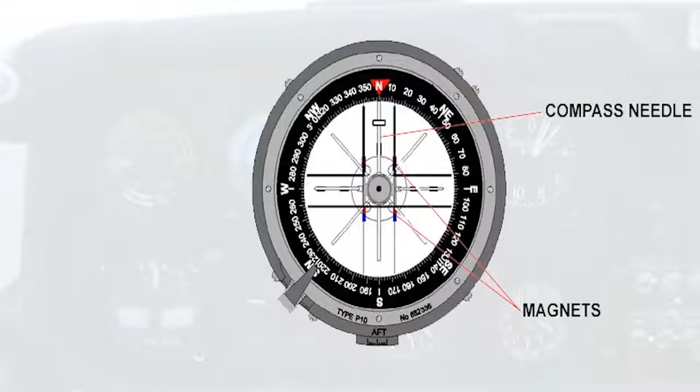A compass is an instrument designed to indicate direction on the surface of the Earth, relative to some known datum. The magnetic compass uses the horizontal component of the Earth's field as its directional datum.

Unfortunately, the Earth's field is normally not aligned with a true meridian, the most desirable datum from which to measure direction. The angular difference between true and magnetic meridians is called the magnetic variation.

The purpose of a magnetic steering compass in an aircraft is to indicate heading, the direction in which the aircraft is pointing.

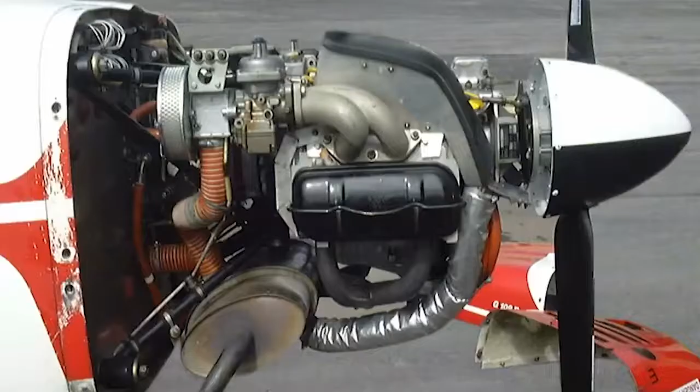Magnetic influences, such as iron or steel components and electric currents, distort the Earth's field so that the compass magnetic assembly deviates from the magnetic meridian. This is called compass deviation.

The rules for applying variation and deviation to the compass heading indication, in order to determine true heading, are discussed later in this lesson.

This part of the lesson deals with the direct indicating, or direct reading, magnetic compass, where the pilot directly reads his heading in relation to a pivoted magnet assembly.

There are two basic types of direct reading magnetic compasses used in aircraft: the vertical card and, less commonly, the grid ring compass.

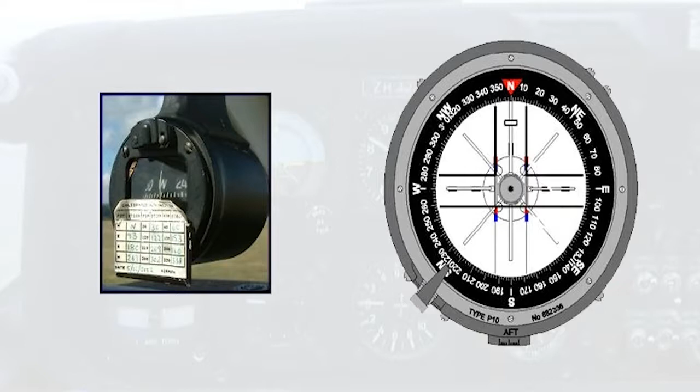The vertical card compass, also known as the B-type or E-type, is a direct reading compass in general use. It's usually the main magnetic heading reference in light aircraft, and the standby compass in larger aircraft.

It consists of a circular compass card attached directly to the magnet assembly. This combined unit is suspended in liquid within the compass bowl. A vertical lubber line on the glass window of the bowl enables the heading to be read off the compass card.

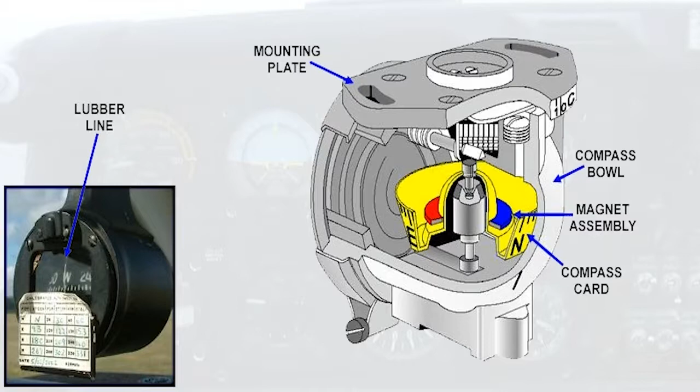The P-type compass, or grid ring compass, is found on older aircraft. It's more accurate than the vertical card compass and is more stable. It is, however, heavier, bulkier, and more expensive.

In addition, it can only be read in straight and level flight, as the grid ring has to be unclamped and aligned with the north reference before a reading can be taken against the lubber line.

The grid ring compass also differs from the vertical card compass in that it achieves greater aperiodicity by the addition of damping wires, which also rotate through the compass liquid.

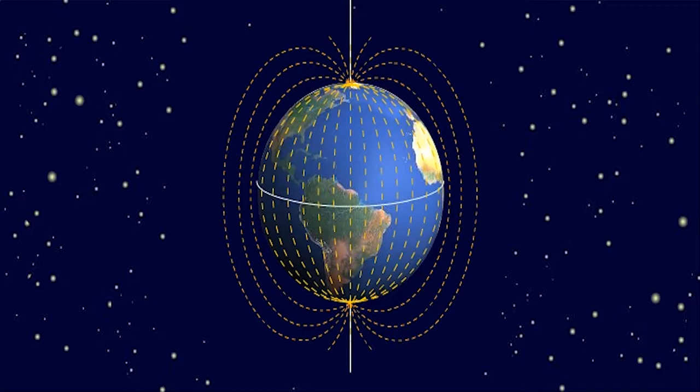The Earth behaves as though a huge permanent magnet was situated near its center, producing a magnetic field over its surface. The direction of that field at any given point can be indicated by a freely suspended magnet.

Such a magnet will align itself roughly in a north-south direction, with its red pole toward the north magnetic pole.

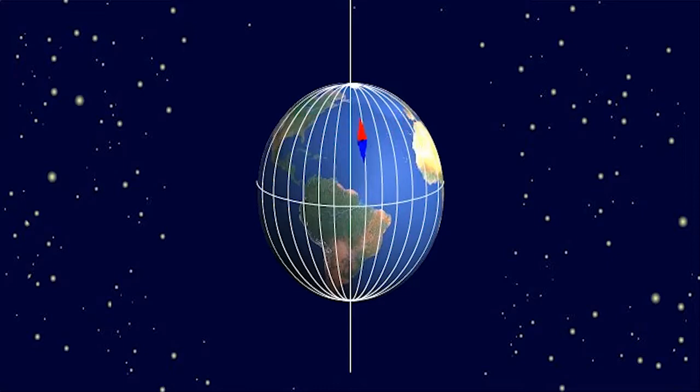However, the poles of the Earth's magnetic field do move, and are seldom coincident with the Earth's spin axis. The position of the north magnetic pole is moving at almost 10 nautical miles per year, and since it was

first located in 1831, it's moved approximately 625 miles, and is presently close to Ellesmere Island in the Canadian Arctic Islands, which are 650 miles west of the geographic North Pole.

That would make the magnetic lines of force lie like this, and the freely suspended magnet will align itself like this.

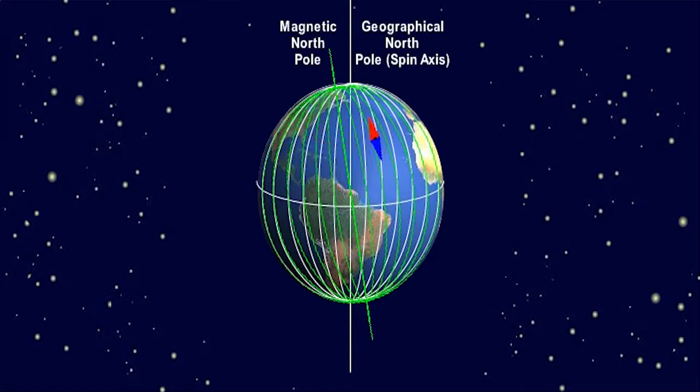The angle, measured in the horizontal plane between the magnetic meridian at a point and the true meridian at the same point, is known as the magnetic variation.

Variation is designated west or east, depending on whether the magnetic pole lies to the west or to the east of true north.

Variation can have any value from 0 to 180 degrees, the latter occurring on the true meridian linking the north geographical pole with the north magnetic pole.

A simple rhyme can be remembered which will help enormously in working out which way to apply variation to your heading: Variation west, magnetic best. Variation east, magnetic least.

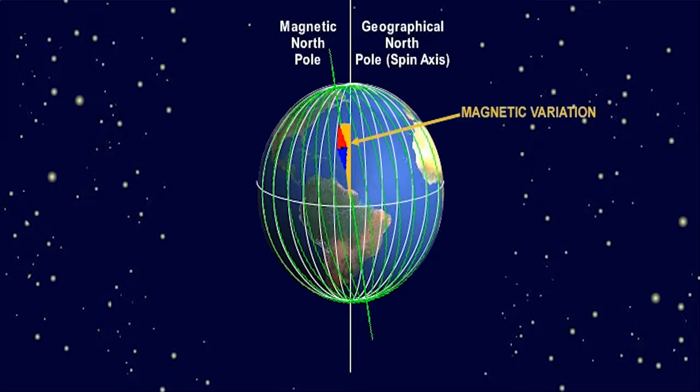Here, an aircraft is flying due east by reference to points on the ground. So, if the variation is west of true north, say 11 degrees west, then add it to your aircraft's true heading to get your correct magnetic heading of 101 degrees.

Conversely, if the variation is east of true north, say 11 degrees east, then subtract it from your aircraft's true heading to get your correct magnetic heading of 079 degrees. Remember: variation west, magnetic best; variation east, magnetic least.

Except near the magnetic equator, where the lines of force are parallel to the surface, one end of the freely suspended magnet will dip below the horizontal, pointing to the nearer pole.

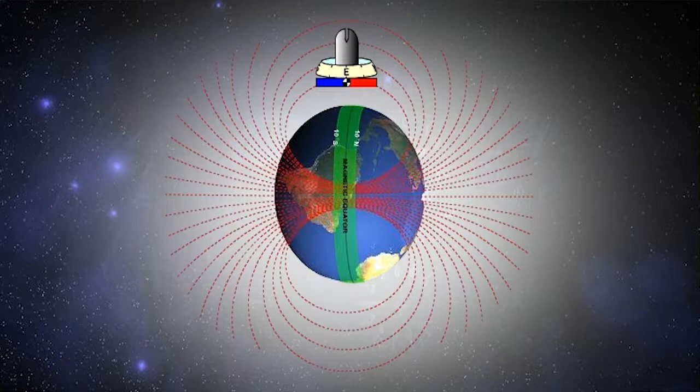To the south of the magnetic equator, the magnet's blue pole will be lower, whereas to the north, the red pole will be lower.

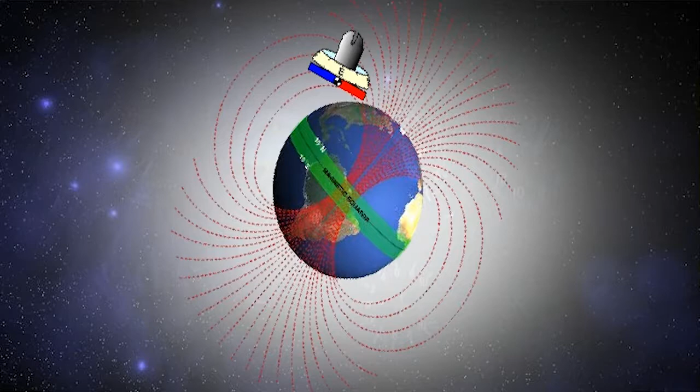The angle, measured in the vertical plane between the axis of the magnet and the horizontal, is called the angle of dip.

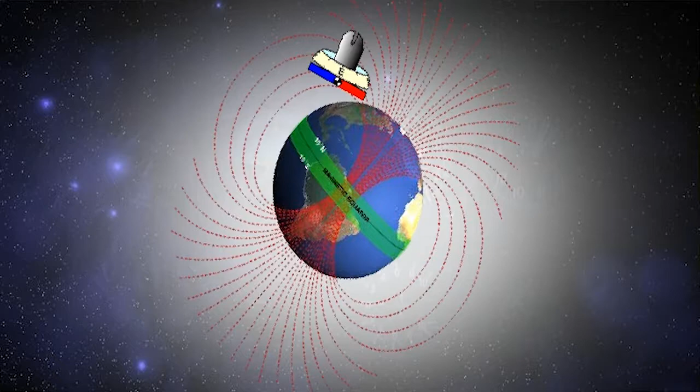If the freely suspended magnet is moved either north or south of the magnetic equator, the dip gradually increases, reaching about 66 degrees in the United Kingdom. Over the Earth's magnetic poles, the dip is 90 degrees, and the magnet is then vertical.

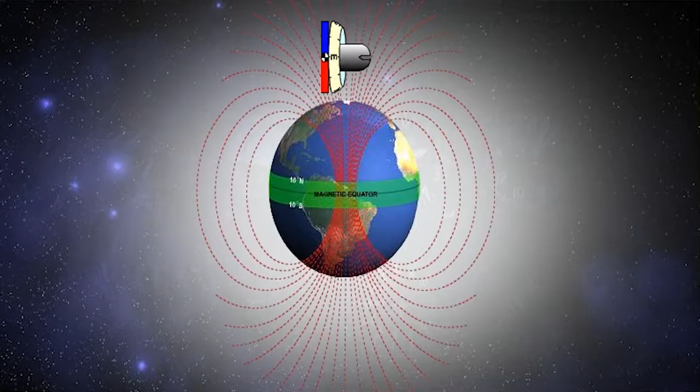During a turn, the liquid in contact with the inside of the compass bowl tends to be dragged around with the bowl. Therefore, the liquid tends to swirl and rotate the magnet assembly with it, in the same direction as the aircraft's turn.

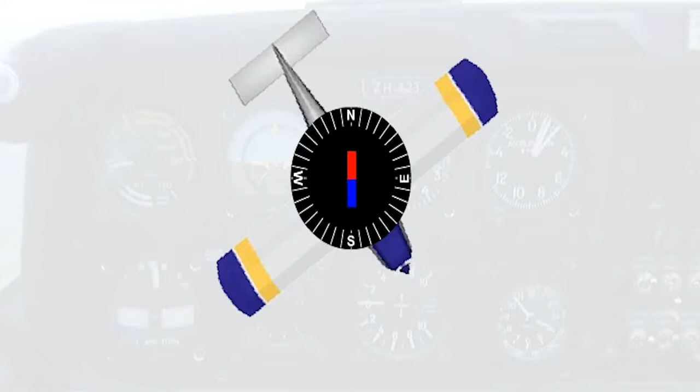Direct reading compasses are subject to large errors during linear acceleration or deceleration, or during a turn. Turning and acceleration errors only occur where there is significant magnetic dip, so that except for a small liquid swirl effect in turns, the errors are non-existent near the magnetic equator.

This diagram shows both the top view and the pilot's eye view of a pendulously suspended magnet, with residual dip, in the northern hemisphere. Note that while the aircraft is in cruising flight, the compass reading is correct. The magnet is attached to the aircraft at the pivot point.

However, while the pivot is being accelerated, the magnet will try to stay where it is because of its inertia, which acts at the magnet's center of gravity. The result will be that, even though the aircraft is flying in a straight line, the magnet will rotate, in this case anti-clockwise, and the incorrect heading will be shown.

Notice that once the aircraft is in cruising flight and the acceleration has finished, the magnet moves back to its original position and once more shows the correct reading.

Turning errors are maximum when turning through north and south, and ignoring liquid swirl, zero when turning through east and west. The error increases with increase in magnetic latitude. At the magnetic equator, the only turning error is due to liquid swirl.

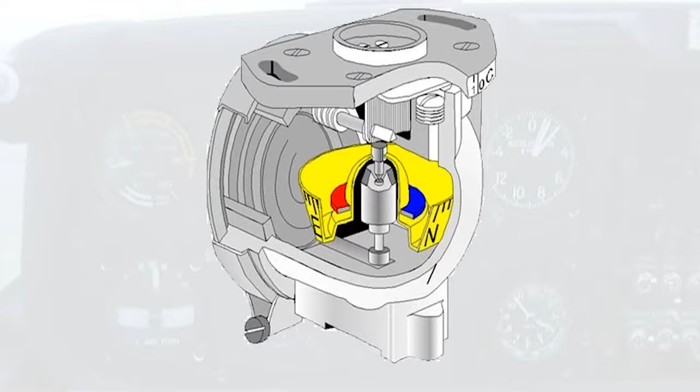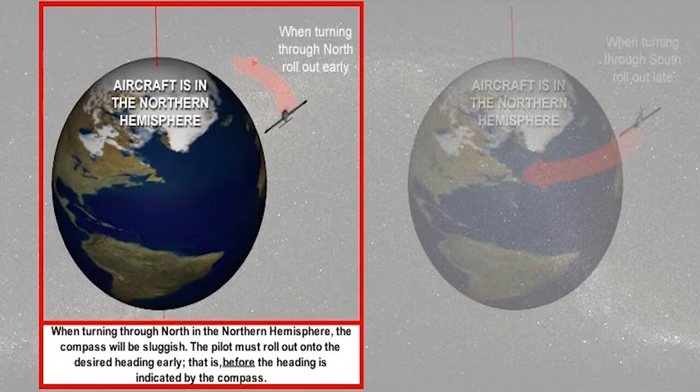Whenever the pilot turns through the nearer pole, that is the North Pole in the northern hemisphere or the South Pole in the southern hemisphere, the aircraft and compass rotate in the same direction, and the compass will be sluggish. The pilot should undershoot the turn, that is, he should roll out early.

Whenever the pilot turns through the further pole, that is the South Pole in the northern hemisphere or the North Pole in the southern hemisphere, the aircraft and the compass rotate in opposite directions, so the compass will be lively. The pilot should overshoot the turn, that is, he should roll out late.

Deviation is produced by the iron, steel, and electrical components of the aircraft. It's the angle between the local magnetic meridian and the direction in which the compass magnets are lying.

Deviation is named easterly or plus if the north-seeking red end of the magnet points to the east of magnetic north. If the north-seeking end points to the west of magnetic north, deviation is said to be westerly or minus.

Deviation varies with heading, so it has to be measured on a series of different headings. This is usually done by conducting a compass swing.

Once deviation has been reduced as far as possible, the residual deviation is recorded on a compass deviation card, which is located in the aircraft.

During the swing, normal flying conditions should be simulated as far as possible, with engines running, electrical and radio services switched on, and the aircraft in a level flight attitude.

It's obviously most important that no ferromagnetic objects such as tools or watches should be placed near the compass, as this would introduce unknown amounts of deviation.

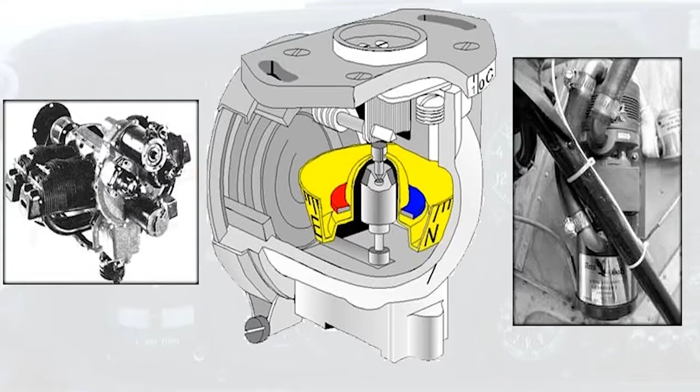Here we see that we are flying with a compass reading of 270 degrees. The compass reading is the magnetic heading plus or minus the deviation on that particular heading. The deviation card makes it easy for us to fly an accurate magnetic heading.

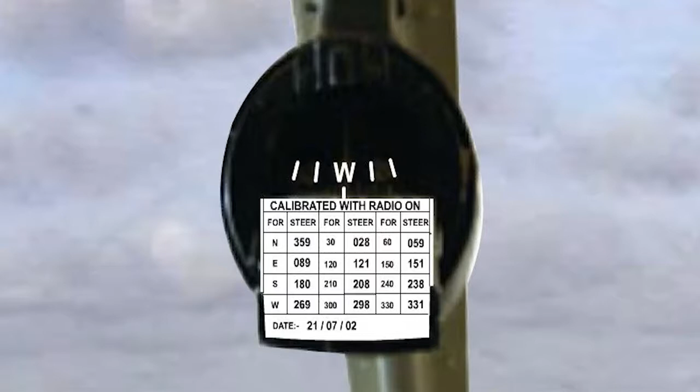In this case, it's telling us that to fly on a magnetic heading of 270 degrees, we must steer 269 degrees.

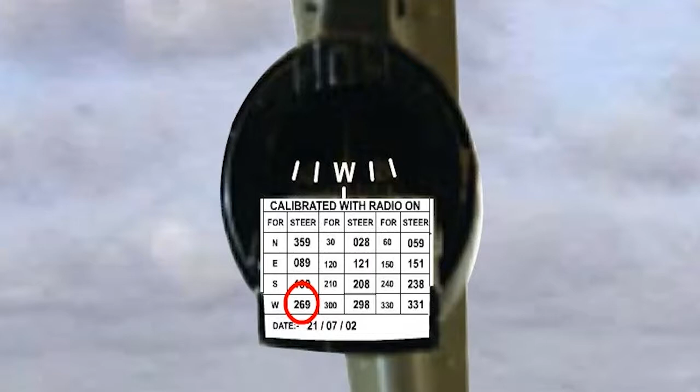The basic method of determining deviation is to compare the aircraft's heading compass reading with magnetic heading, as defined by a high-quality land or datum compass.

This comparison of aircraft compass and magnetic datum readings is carried out in an area selected specifically for this purpose. Major compass errors are corrected by adjusting small magnets mounted in the compass system.

Any residual errors that remain are shown on a compass deviation card displayed in close proximity to the compass in the cockpit.

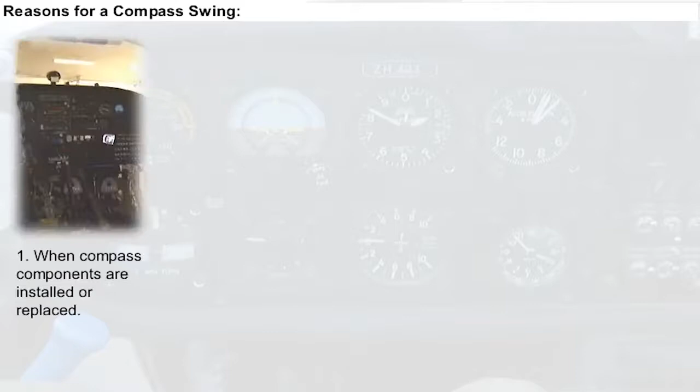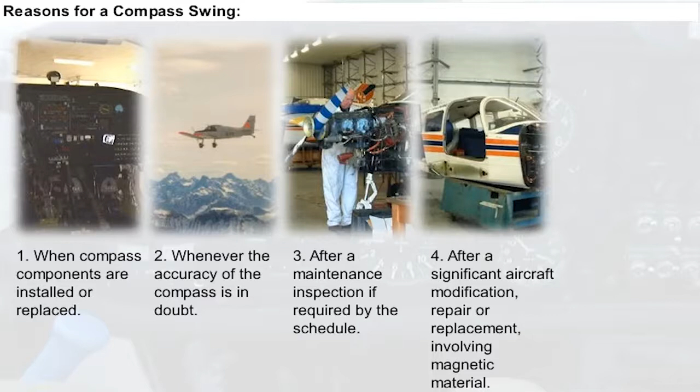There are several occasions when an aircraft might require a compass swing. Among these are when compass components are installed or replaced, whenever the accuracy of the compass is in doubt, after a maintenance inspection if required by the schedule, after a significant aircraft modification, repair or replacement involving magnetic material, or if the aircraft has been struck by lightning.

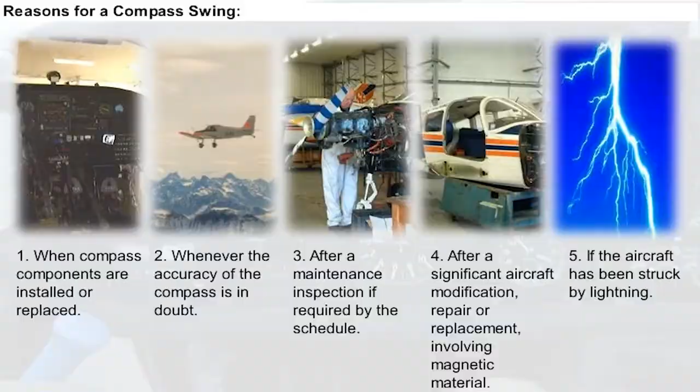Check that there is no obvious damage to the compass body such as dents or cracks. Any lighting system should be checked, as should the efficacy of luminous paint.

The compass liquid should be checked and be free from sediment and discoloration, either of which would indicate corrosion, which would result in increased pivot friction.

The compass liquid should also be free from bubbles, which would probably indicate a leaking seal. Turbulence and maneuvers would cause any bubbles to move about, creating eddies which could disturb the magnet system.

The compass reading can also be checked for gross errors when you first enter the aircraft, and make sure that the compass deviation card is placarded conveniently close to the compass.

Check the compass reading while taxiing the aircraft. Remember, the compass reading should decrease when you're turning left and increase when you're turning right.

Just before takeoff, check the compass reading against the runway QDM.